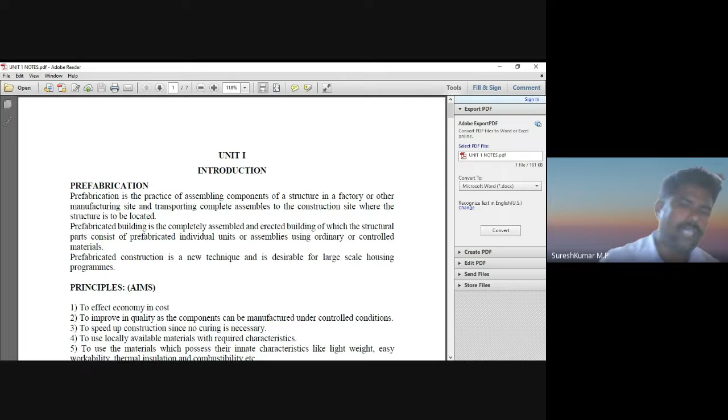Before going into the subject of prefabrication, what is prefabrication? What is the need for prefabrication? Prefabrication means preparing a material in some place. It can be transferred to another place, and it can be erected in some other place. Okay, this is the prefabrication. If the area is large enough at the site itself, we can do prefabrication on the site itself. Okay, this is the on-site prefabrication.

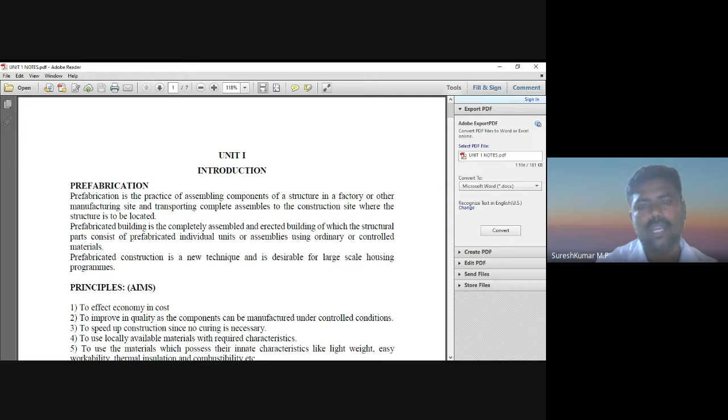Prefabrication is the practice of assembling components of a structure in a factory or other manufacturing site and transporting complete assemblies to the construction site where the structure is to be located. A prefabricated building is the completely assembled and erected building of which the structural parts consist of prefabricated individual units or assemblies using ordinary or controlled materials.

Prefabricated construction is a new technique and it is desirable for large-scale housing programs. If n number of low-cost houses are to be built, the entire members can be quickly manufactured because the size and shape of the members would be the same, so they can be produced multiple times with the help of multiple molds. Okay. Then what are the principles or aims of the prefabricated structure?

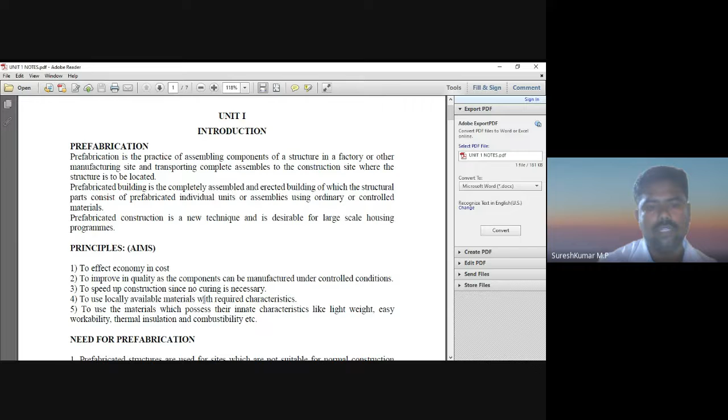To effect economy in cost, to improve quality as the components can be manufactured under controlled conditions, to speed up construction since no curing is necessary, to use locally available materials with the required characteristics, then to use materials which possess their innate characteristics like light weight, easy workability, thermal insulation and non-combustibility.

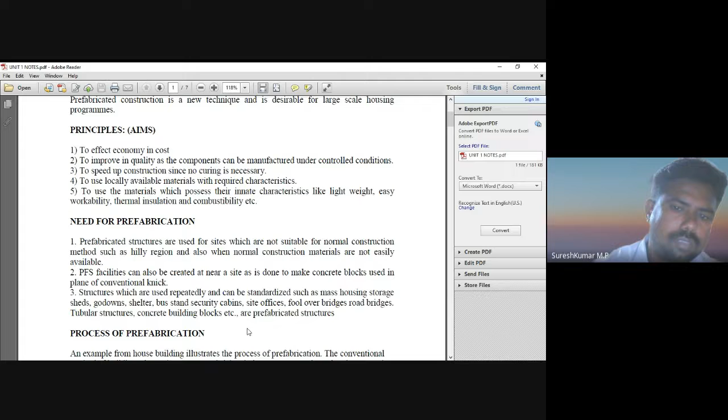Okay. What is the need for prefabrication? Why must prefabrication be important or needed at this time? Prefabricated structures are used for sites which are not suitable for normal construction methods, such as hilly regions, or also when normal construction materials are not easily available. If locally available materials are lacking or it is a hilly region, you can go for prefabricated structures.

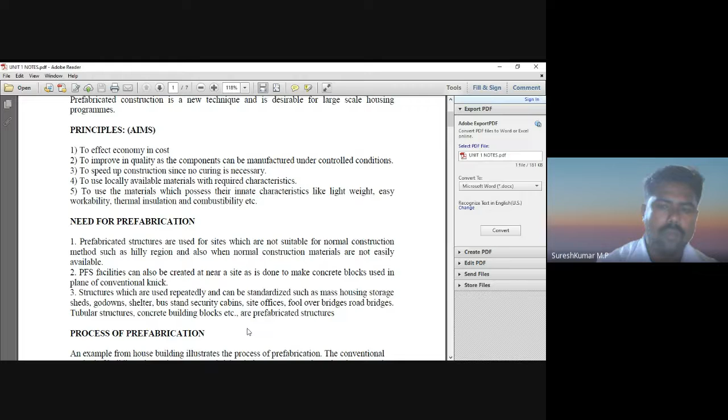Prefabrication facilities can also be created at a site to make concrete blocks used in place of conventional construction. Structures which are used repeatedly and can be standardized, such as mass housing, storage sheds, godowns, shelters, bus stands, security cabins, site offices, foot-over bridges, road bridges, tubular structures, and concrete building blocks, are prefabricated structures.

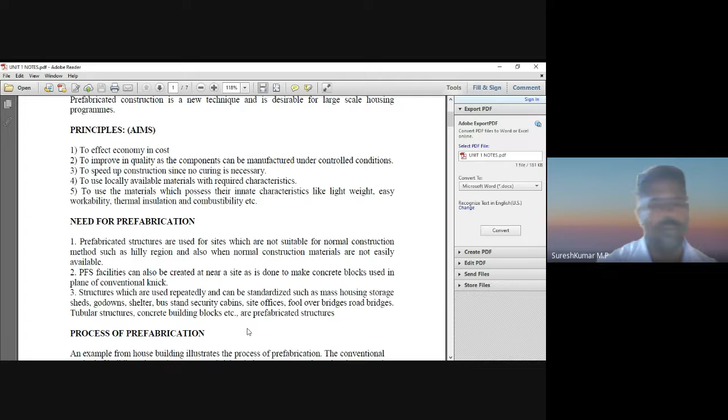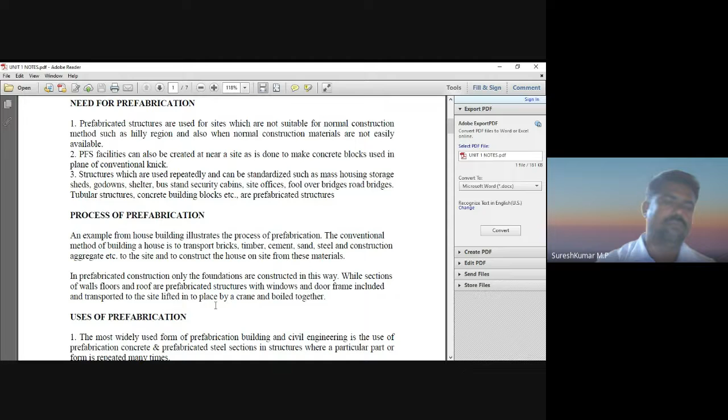What is the process of prefabrication? An example from house building illustrates the process of prefabrication. The conventional method of building a house is to transport bricks, timber, cement, sand, steel, construction aggregates, etc. to the site and to construct the house on site from these materials. In prefabricated construction, only the foundations are constructed in this way. The remaining sections, walls, floors, slabs, staircases, everything including window frames, can be made by prefabricated construction.

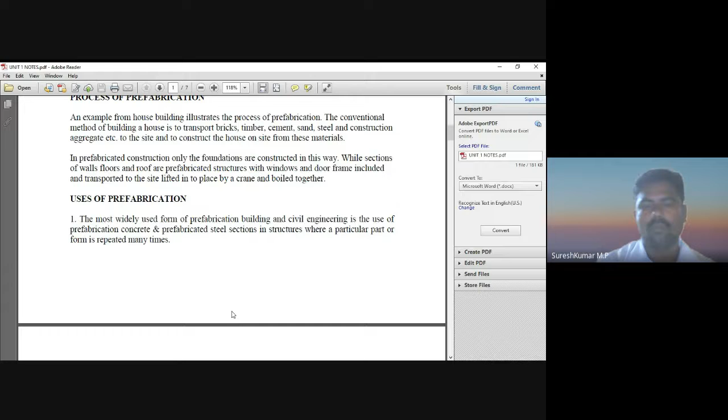What are the uses of prefabrication? The most widely used form of prefabrication in building and civil engineering is the use of prefabricated concrete and prefabricated steel sections in structures where a particular part or form is repeated many times. Okay. Pouring concrete sections in a factory brings the advantage of being able to reuse molds. Prefabricated steel sections reduce on-site cutting and welding costs as well as the associated hazards.

Prefabrication techniques are used in the construction of apartment blocks and housing developments with repeated housing units. The technique is also used in office blocks, warehouses, and factory buildings. Prefabricated steel and glass sections are widely used for the exterior of large buildings. Prefabricated bridge elements and systems offer bridge designers and contractors significant advantages in terms of construction time, safety, environmental impact, constructability, and cost.

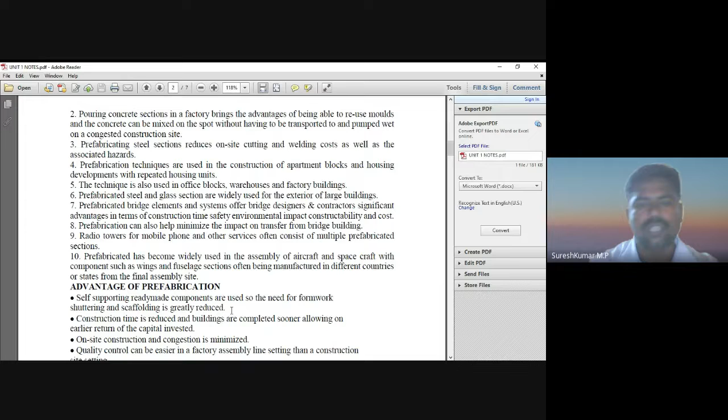Prefabrication can also help minimize the impact on traffic from bridge building. Radio towers for mobile phones and other services often consist of multiple prefabricated sections. Prefabrication has become widely used in the assembly of aircraft, spacecraft, and also lampposts. It can be used as a prefabricated member, and sleepers in railway tracks can also be used as prefabricated members.

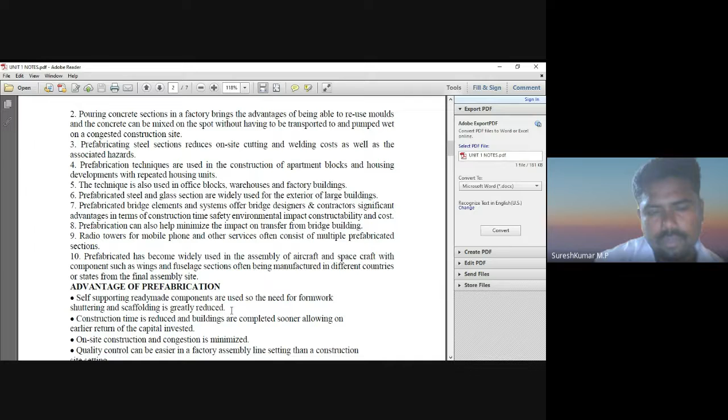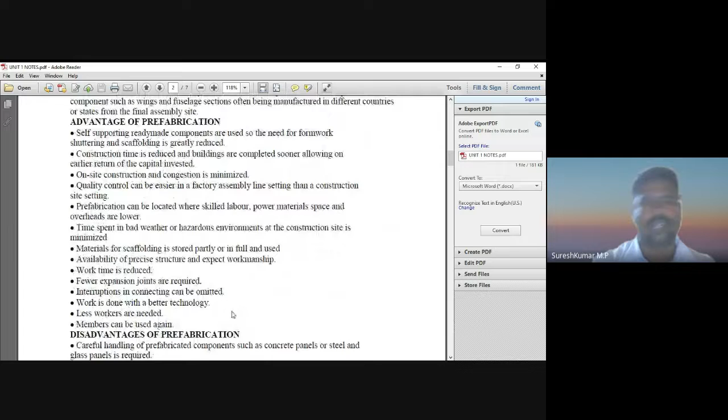What are the advantages of prefabrication? Self-supporting ready-made components are used, so the need for formwork, shuttering, and scaffolding is greatly reduced. Construction time is reduced, and buildings are completed sooner, allowing an earlier return of capital investment. If you consider a Chennai Silks building, it would be constructed by the normal process within 8 to 10 months. But by the prefabricated method, it can be constructed in 3 months. So the owner saves about 6 months of construction time.

Okay. On-site construction congestion is minimized. Quality control can be easier in a factory assembly line setting than a construction site setting. Prefabrication can be located where skilled labor, power, materials, space and overheads are lower. Time spent in bad weather or hazardous environments at the construction site is minimized. Materials for scaffolding are saved partly or in full.

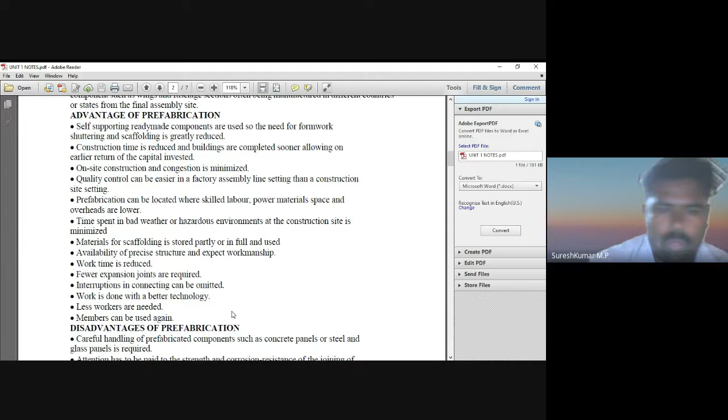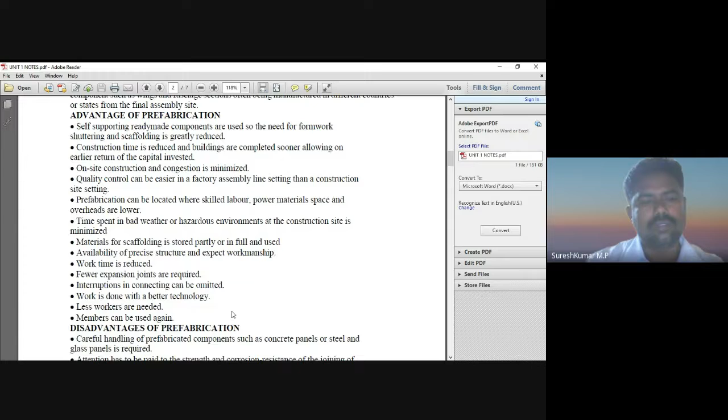Availability of precise structure and expert workmanship. Work time is reduced. Fewer expansion joints are required. Interruption in connecting can be omitted. Work is done with better technology. Less workers or less skilled laborers are needed. Members can be used again.

Okay, for low cost housing, if there are so many houses or thousands of houses, the same mold can be used n number of times. Okay, but the quality of the mold should be maintained properly.

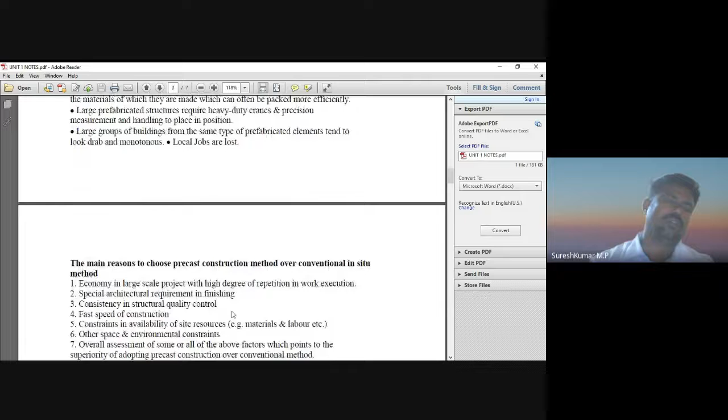Transportation cost may be higher. Large prefabricated structures require heavy-duty cranes. Large groups of buildings from the same type of prefabrication elements tend to look drab and monotonous. Local jobs are lost.

The main reasons to choose the precast construction method over the conventional in-situ method were, first, economy in large scale projects with a high degree of repetition in work execution. Okay, for housing boards, low cost houses, police quarters, EB quarters, anything repeated, the same type of monotonous construction can be made by using prefabricated structures,

because n number of same sizes and same design materials can be used in every site or every location, because if the mold quality is good, we can finish the casting process and the construction work can be over quickly.

Special architectural requirements in finishing, consistency in structural quality control, faster speed of construction, constraints in availability of site resources, other space and environmental constraints, and overall assessment of some or all the above factors point to the superiority of adopting precast construction over the conventional method.

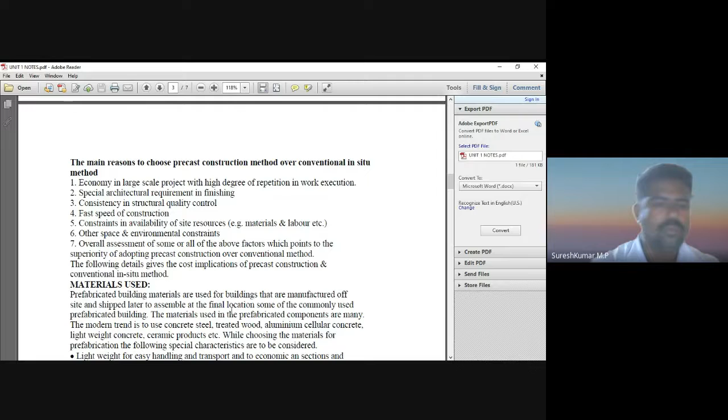Next thing is, what are the materials used? Okay, what are the materials that can be used in prefabricated structures? Prefabricated building materials are used for buildings that are manufactured offsite and shipped later to assemble at the final location. Some of the commonly used prefabricated building materials are,

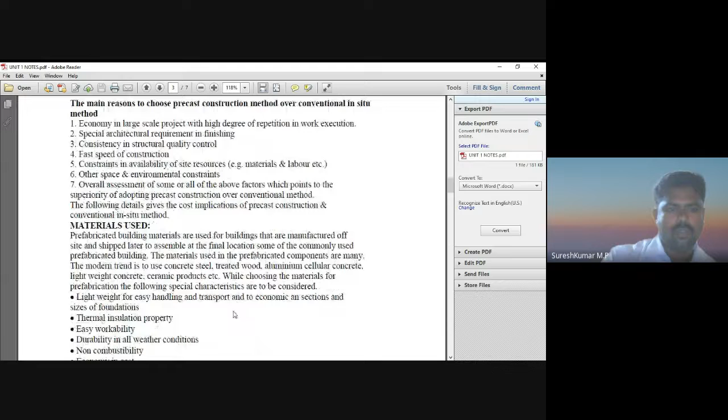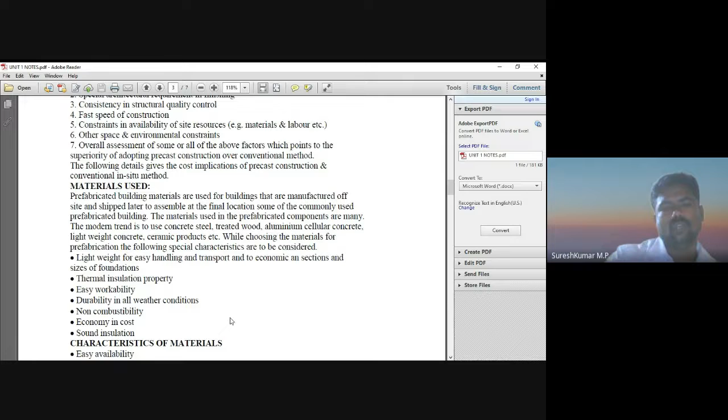lightweight, easy handling materials, thermal insulation property, easy workability, durability, non-combustibility, economy in cost, sound insulation. These seven or eight things should be incorporated in a material used in a prefabricated structure. What are the characteristics of materials needed? Easy availability, lightweight, thermal insulation property, easy workability, durability, non-combustibility, economy in cost. Economy is available in all the advantages.

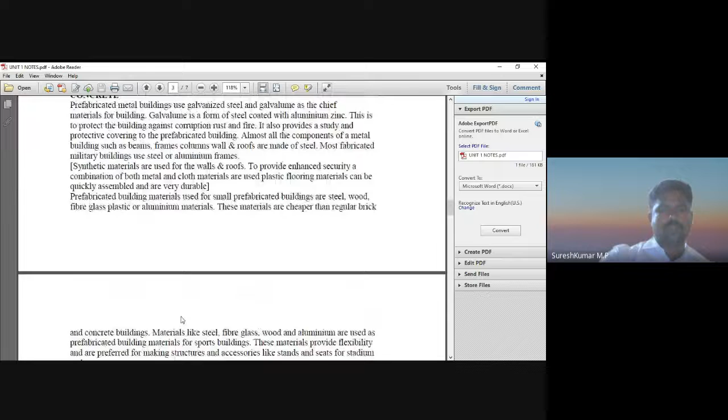Okay, the materials that can be used in prefabricated structures are aluminum, steel, wood, fiberglass, concrete. Okay, prefabricated metal buildings use galvanized steel and galvalume as the chief materials for building because these materials are lightweight. Okay, and they can be easily transported, and also easily hoisted or lifted.

Okay, galvalume is a form of steel coated with aluminum zinc. This is to protect the building against corrosion, rust, and fire. It also provides a steady and protective covering to the prefabricated building. Almost all the components of a metal building such as beams, frames, columns, walls, and roofs are made of steel. Most prefabricated military buildings use steel or aluminum frames. Okay.

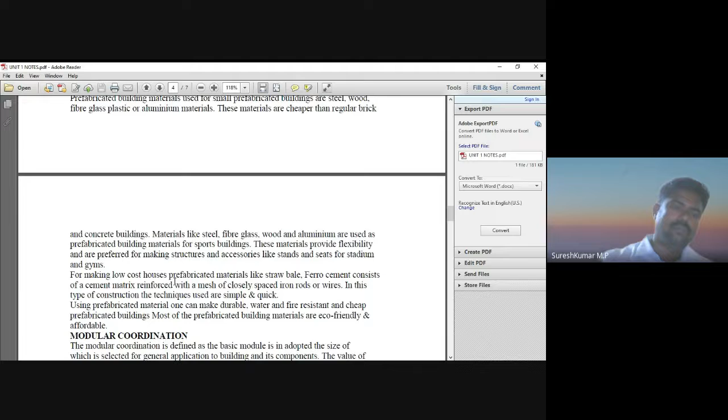The prefabricated building materials used for small prefabricated buildings are steel, wood, fiberglass, plastic or aluminum. These materials are cheaper than regular brick and concrete buildings. Materials like steel, fiberglass, wood, and aluminum are used as prefabricated building materials for sports buildings. These materials provide flexibility and are preferred for making structures and accessories like stands and seats for stadiums and gyms.

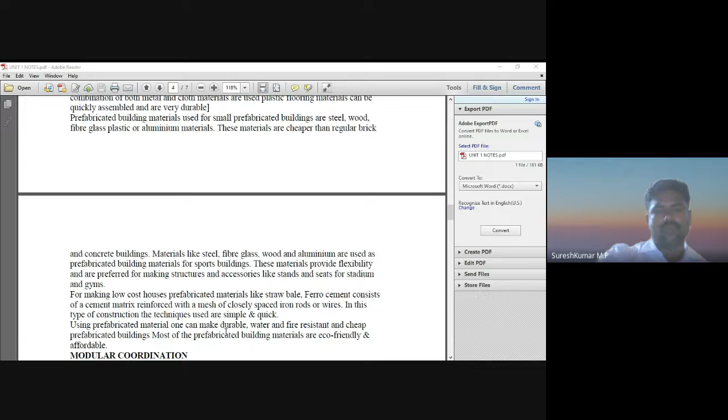For making low-cost houses, prefabricated materials like straw bale and ferro cement, which consists of a cement matrix reinforced with a mesh of closely spaced iron rods or wires, are used. In this type of construction, the techniques are simple and quick. Using prefabricated material, one can make durable, water and fire resistant, and cheap prefabricated buildings. Most prefabricated buildings are eco-friendly and affordable.

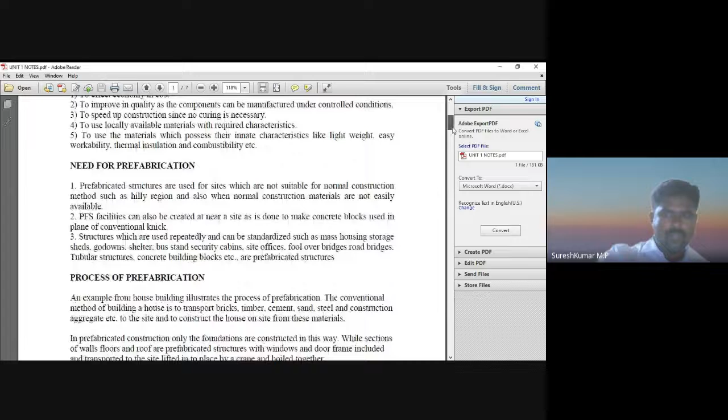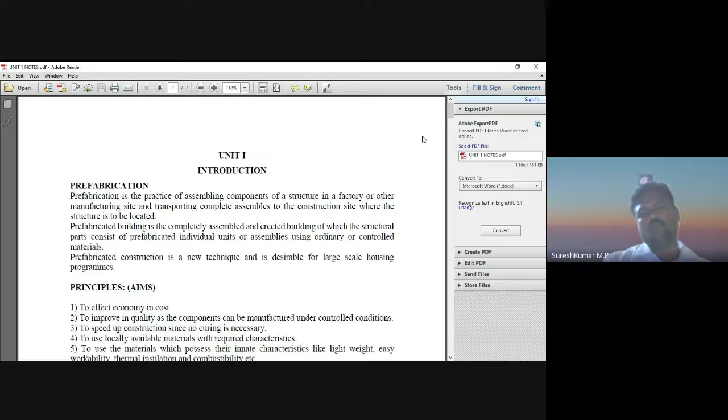Okay, in this class we have seen what prefabrication is, its principles, the advantages, disadvantages, the need, the importance, what materials are required, and the quality of the materials, everything we have discussed.